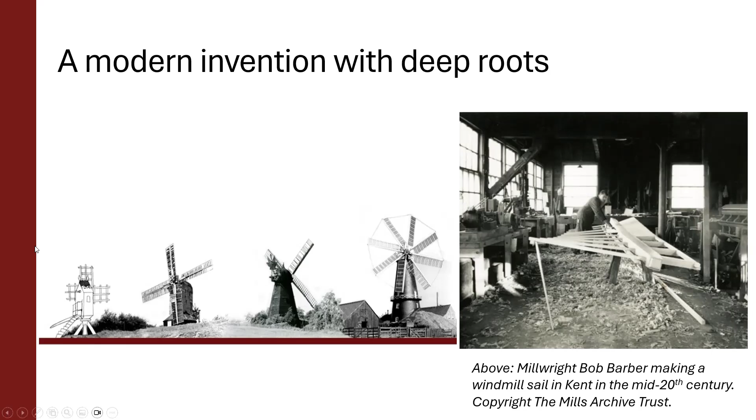They then start to decline. You've got the Industrial Revolution, bigger populations, people moving to the towns, and also cheaper grain, including from abroad in certain places. So what you then see happening is these really big factories being established. The milling technology in terms of food and flour production was also developing, so these big factories could have multiple roller mills rather than millstones, which could produce white flour. The small traditional windmills just couldn't compete. They were rural, they didn't benefit from being surrounded by the fields anymore, so a lot of them fell into disrepair.

But thankfully, there were people back then who could still see the value of them beyond preserving them for cultural reasons. People were looking at them and thinking, well, could this technology be utilized instead to generate electricity? So people were starting to ask those questions. Around the 1870s, we're seeing more developments in electricity generation, and development of lamps, different types of lamp. Electricity started off in the big cities, lighting up public spaces, but over time it was also becoming more affordable to be used in people's houses.

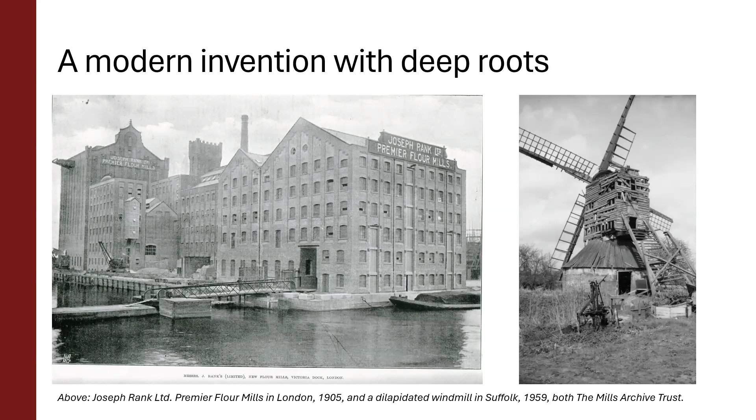I did a bit of digging, this was actually over the internet, this wasn't in our own archive, but this also really makes the point of the value of archives, I would say.

There are some really interesting digitized journals, and I enjoyed going through them trying to find really early conversations about the electricity generation potential of wind. I found one from 1872 where, alongside concerns about the finite nature and rising cost of fossil fuels, particularly coal, the author discusses the use and abuse of coal, noting it's getting very expensive and at some point we'll run out. Although he didn't think wind would be a goer, he felt compared with the steam engine it wouldn't be economical.

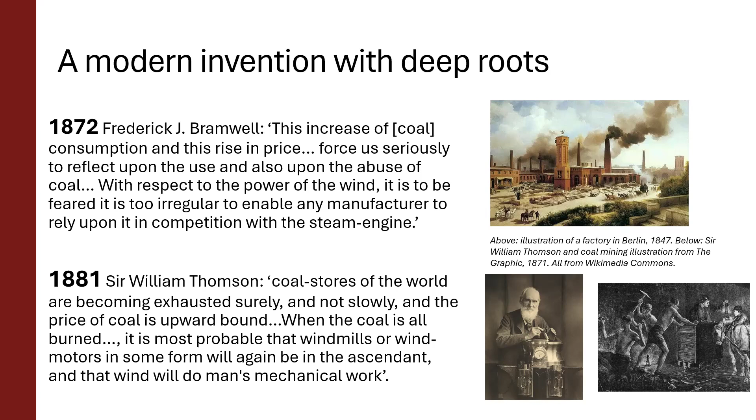Then in 1881, Sir William Thomson again raised concerns about coal supply, but felt that wind could be utilized to generate electricity. What he added was that the technology wasn't yet at a point where it was economical enough to do it, so more work still needed to be done. Interestingly, this is two years before what we now know to be the earliest example of a wind turbine built to generate electricity, which I'll come back to.

Someone else, Mr. Lane Fox Pitt, was asked in another article how much it might cost to light a house with electricity, and he said that with a windmill it would actually be quite cheap to do. Lane Fox Pitt also got a patent for a light bulb, which was acquired by an American pioneer called Charles Brush, who I'll also come back to. I thought that was quite a nice connection.

We will all have heard of Siemens and William Siemens - I should have probably changed the name of my presentation to Pioneers in the Domain of Nature, because that just sounds really powerful. He had quite an extensive article in 1882 talking about the benefits and value of electricity, because it's easy to take these things for granted now. But what we're seeing is a more positive view on the potential use of wind to generate electricity. He also talked quite a bit about the polluting effects of coal burning.

Okay, so thank you for listening to the really early stuff - that's just to give you a bit of context, because I think you'll find that people were building on the inventions and work of those who'd come before them. So now I'm going to look at some of the individuals who were involved and some of their stories as well.

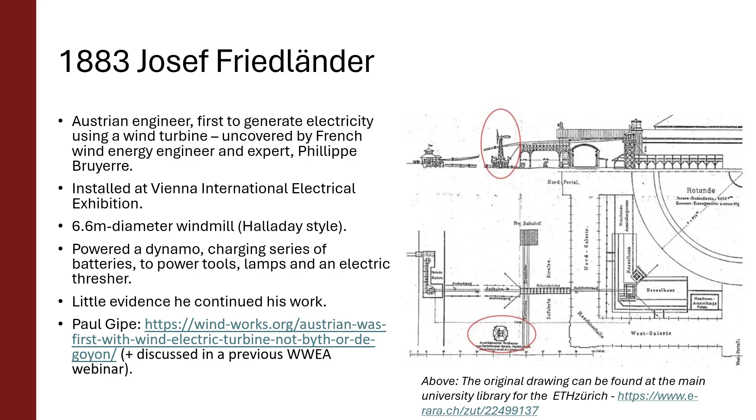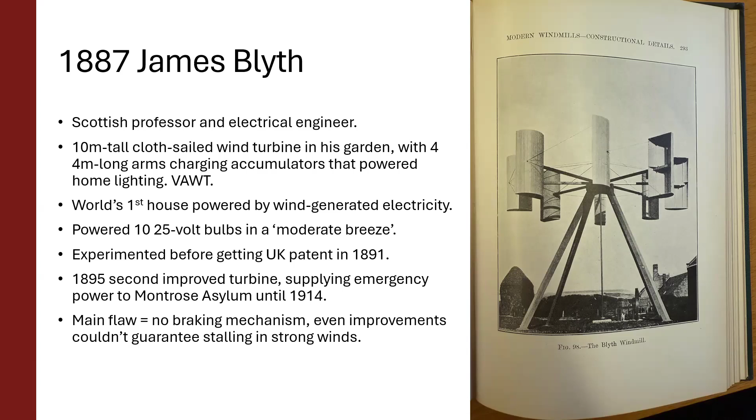This is another one - presumably the first one that he did. You can find these images online, but I also thought I'd include an image of a book we've got in our library called Natural Sources of Power. That's a 1908 book which has a little bit of information about James Blyth and has these images reproduced in it as well.

Now, thank you again, Paul Gipe, in partnership with Erik Möllerström, because I could find very little about this person. Also in 1887, just a little later than James Blyth, Charles de Goyon, a Frenchman, with a group of people designed a wind turbine, and what they were doing was charging batteries for commercial sale. He also designed one at some point to power a lighthouse, funded by the government there.

If you're interested in finding out more, among many other things, Paul and Eric have published this article. It's open access, and it's just part one, so you can also read on more if you would like to. He was using a design similar to those used in North America and Europe, again looking at this issue of trying to reduce the need for people to be involved in reefing them, as we'd say for traditional mills, so reducing the likeliness of them damaging themselves in strong winds - automatically self-regulating.

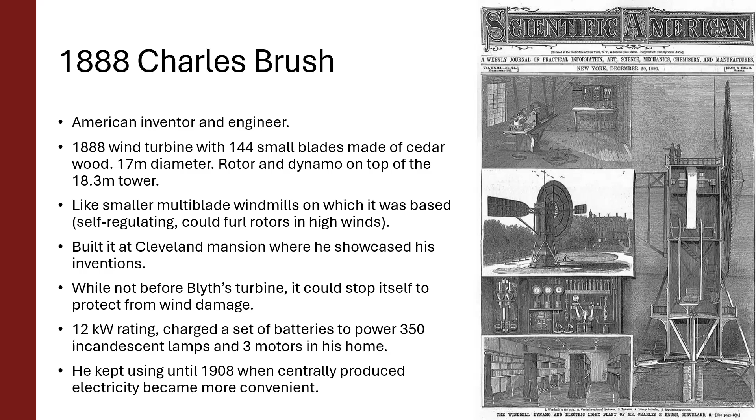He had a lot of successes in his life, a very talented scientist, even before he moved into wind power. But he moved from Copenhagen to somewhere called Askov, and he worked at the high school there, teaching, and then he began experimenting with wind energy.

He managed to get a grant from their government. He was looking at things like how do you regulate the turning speed so you don't get these big spikes. So he developed a new piece of technology called a kratostat.

The other thing he did, and again I got this from Paul Gipe's article, was wind tunnel experiments, which I think sound fascinating. So in 1897 he was doing that to see how could you make it as aerodynamic as possible.

The other thing I liked in Paul's article was he talked about millwrights - the people who had the knowledge to build and repair the traditional windmills. For me this is just showing it's building on, or reinforcing, the traditional knowledge that was already there - in this case, that 4 blades were actually better than 6.

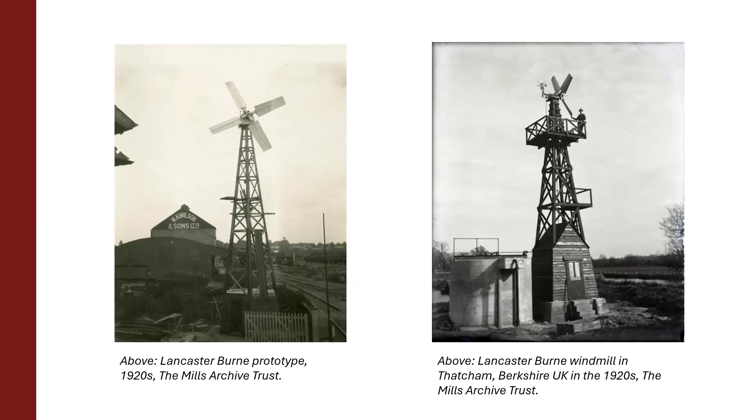And then you see the image on the right - this is actually not too far from where the Mills Archive Trust is based. This is one of these examples of his early wind turbine, which I just think is brilliant. Another example on the left - I think he lived in Blackheath, so this may well have been one also on his grounds as well.

Something really cool happened - I think as a result of a World Wind Energy webinar, someone contacted me afterwards. I don't know if they're in this call actually, a renewable energy professor, and he knew about Lancaster Burne, and he knew that there was at least one example of a Lancaster Burne wind turbine in Australia. So I've had a look, and since then they've actually done a lot more digitization, so you can see now.

This is the University of Melbourne Archives. It's a particular collection, and it was a wealthy family, the Grimwade family, and they had this Lancaster Burne wind turbine in their garden for quite a period. This photo is from 1931, but there's photos going back to 1924. So I'm now dying to find out more - I think they do have some diaries that talk a bit more about how it actually got there, and how that connection was made.

So that was just like a whistle stop tour of the key pioneers. I'm just keeping an eye on the time - I think I'm doing okay actually. So I'm pretty much done now.

Lots more to come from my colleagues.

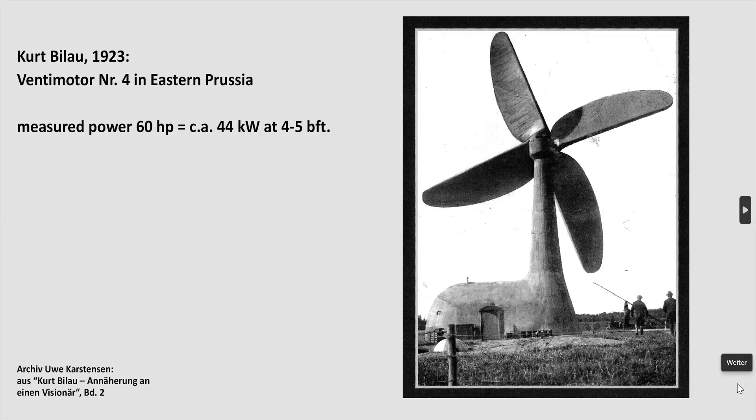He made many Ventimotors. He called this Ventimotor, but this has nothing to do with the Ventimotor company I will later talk about. He called it Ventimotor and built several in Eastern Prussia, I think on the same tower. He has huge concrete towers for this turbine. And yeah, here 60 horsepower is written, but it's 44 kilowatt.

And in 1924, he had built a turbine by a Berlin company, Aerodynamo, and exported it to Oxford. Near Oxford in Great Britain was a test site. It's written in this book that they had 5 English turbines, 1 Danish and 1 German tested there.

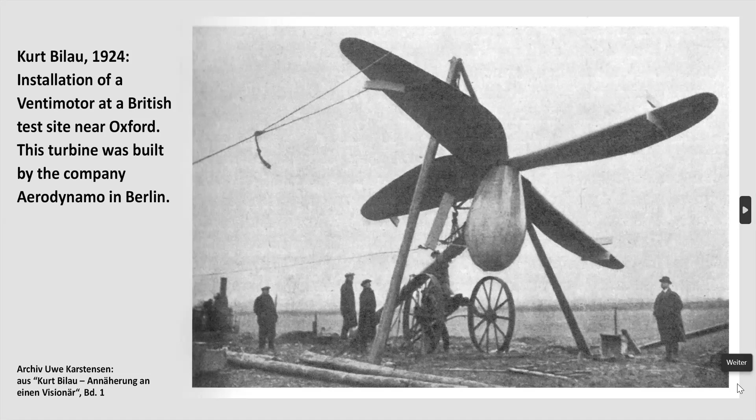But this was later built. Bilau's main advantage, you can still look at it till nowadays, is the Ventikanten wings for old windmills.

He built blades. They look like, if you look at an airplane, they divide when an airplane is landing and will go down, will manage stall, then they divide the wings. This he made with his wings, and there are still 10 of such windmills existing in Germany and in the Netherlands with Bilau Ventikanten.

The 1920s was influenced by aircraft development, and there was a lot of scientific work. The main scientific work important for nowadays is that of Albert Betz at the Aerodynamic Experimental Institute in Göttingen, the Aerodynamische Versuchsanstalt. He wrote in an article, he determined the law of Betz, with a theoretical maximum of the use of wind power. That is 59% of the stream, of the energy of the airstream, that is usable theoretically.

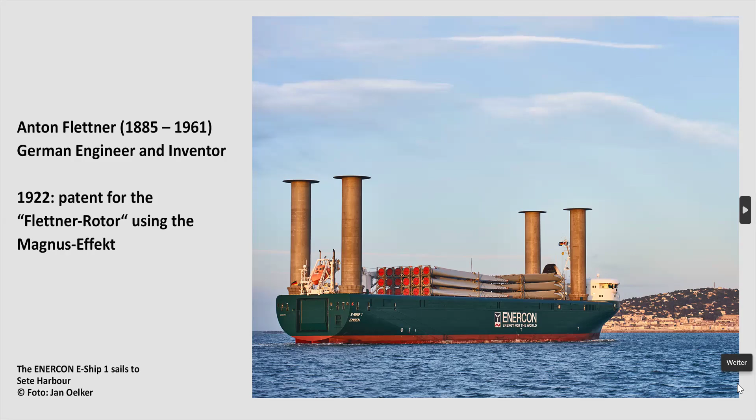Only a few times it was used, and the best hidden secret on the ship was how efficient it works, how much fuel it saves. Sigurd Savonius, a Finnish architect, also influenced by this research, invented the Savonius rotor, using the Magnus effect in another way, with two effects overlaid.

I was in Russia, and they told me that there were a lot of old wind turbines. Thank you to Jos Beurskens - he gave me a couple of years ago some photographs, scans of an album of photos from the Russian wind industry. This was situated mainly in the Tsentralny Aerogidrodinamichesky Institut (TsAGI).

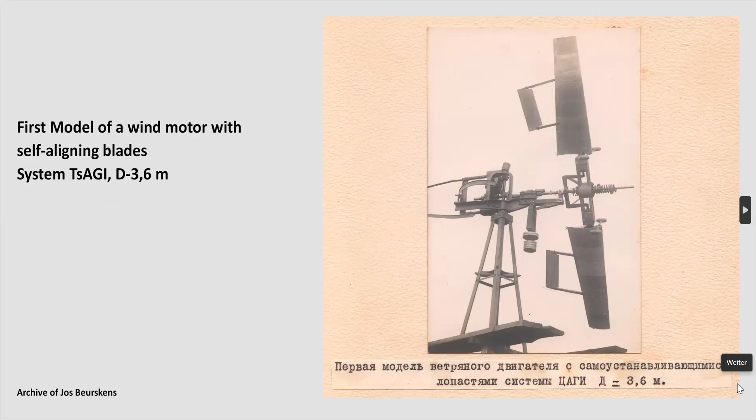This is the Aero and Hydrodynamic Institute in Moscow. It was founded in 1918 and got a department of wind energy in 1920. They developed wind turbines with self-aligning blades. In Moscow they tested it in small systems, and then it spread over the country.

This is a pumping system near Odessa in southern Ukraine, also with a rotor diameter of 8 meters.

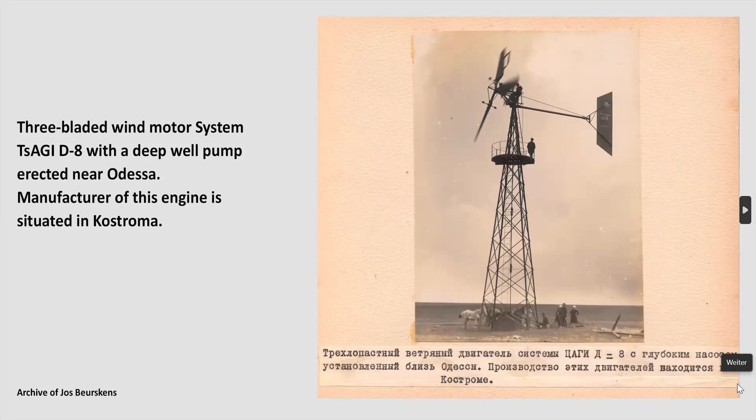Then there was a huge program. The Russians developed a department for the Northern Sea route through the Arctic. It was possible - the first crossing was at the end of the 19th century.

And the carpenter in Uelen told me that such a turbine also used to stand in Uelen, but it was not there anymore.

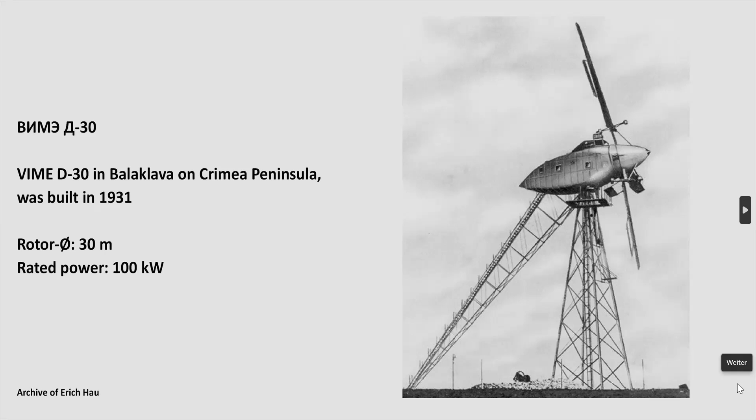The most famous turbine in Russia was a VIME D-30 in Balaklava on Crimea Peninsula. These are from the book of the Vsesoyuzny Institut Mechanizatsii i Elektrifikatsii Selskogo Khozyaystva, the Institute for Mechanization and Electrification of Agriculture. It was built in 1931 on the Crimea Peninsula, but unfortunately there was a war too.

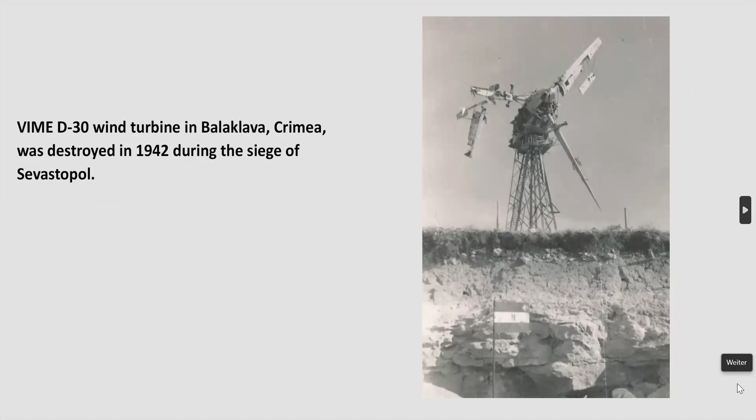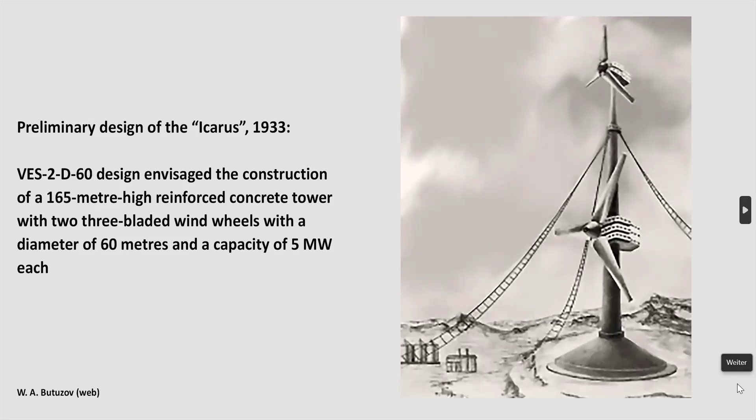The constructor, the architect of this tower, later made the TV tower in Moscow, which is 500 meters high - he had these ideas very early already. This was a time when all countries intended to build great turbines, and the importance for industry became apparent once turbines got bigger than 1 megawatt.

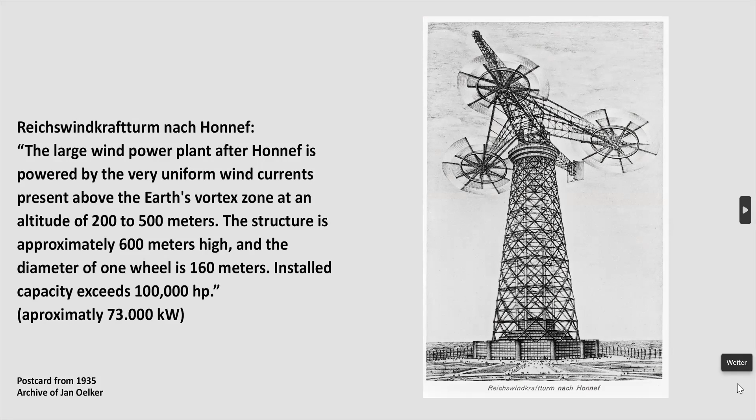It was fantastic, but fantasy. Also a huge plan was the MAN project of MAN and Kleinhans in 1942. But anyway, there was no chance to build this.

It was already the time of war, and neither in Russia nor in Germany was any big turbine built, because all the material went into the war industries. So some suitable windmills were constructed in Denmark with a 70 kilowatt turbine in 1942, the FLS Aeromotor. And of course, the world's first megawatt-size wind turbine at Grandpa's Knob from Smith-Putnam in the USA.

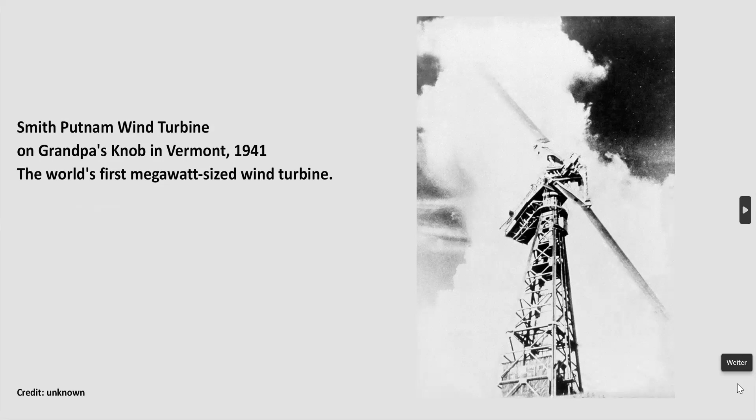The war interrupted everything, and there was also a need for smaller turbines, especially in Germany, with some inventors like Wilhelm Teubert.

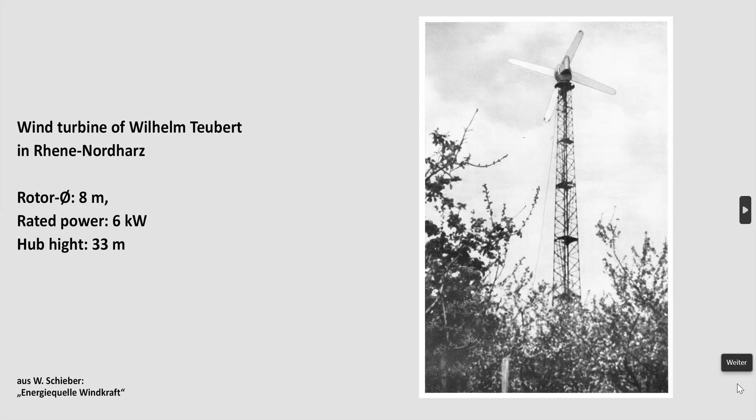He tried to make small turbines together with Gute Hoffnungshütte, and then you have the company Ventimotor, owned by Walter Schieber. Walter Schieber was a member of the SS, an intimus of Hitler, and he suggested making wind turbines for the eastern areas they occupied in the war, to bring power to the eastern occupied areas in Ukraine, Russia, Belarus, and everywhere in Europe where they were, where he had a testing site in Weimar.

At this testing site, Ulrich Hütter could build one of his turbines and make studies, and he wrote his dissertation, a contribution to the creation of design principles for wind power plants, in Weimar. Shortly after publishing his dissertation, he was sent to Stuttgart, where he had to develop systems for the war industry. The wind power program came to a stop, and so did the war in the end.

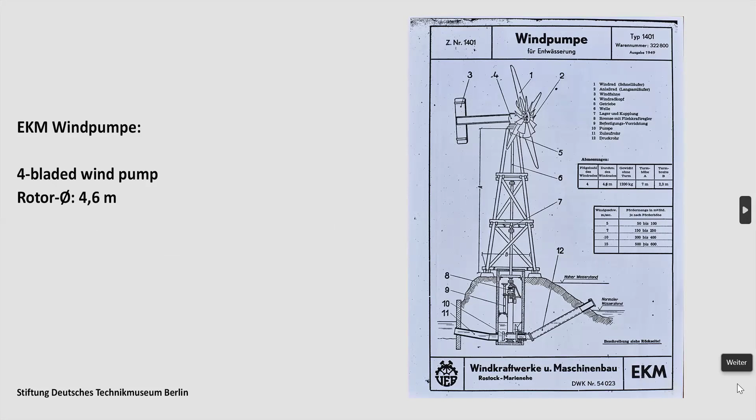In Rostock, there were three airplane factories, and one of these constructed windmills for pumping systems and small chargers. This was a company, EKM Windkraftwerke. EKM means Association of State-Owned Energy and Power Engineering Companies. They built a small four-bladed wind pump with a diameter of 4.6 meters, and a charger with 200 watts for remote areas.

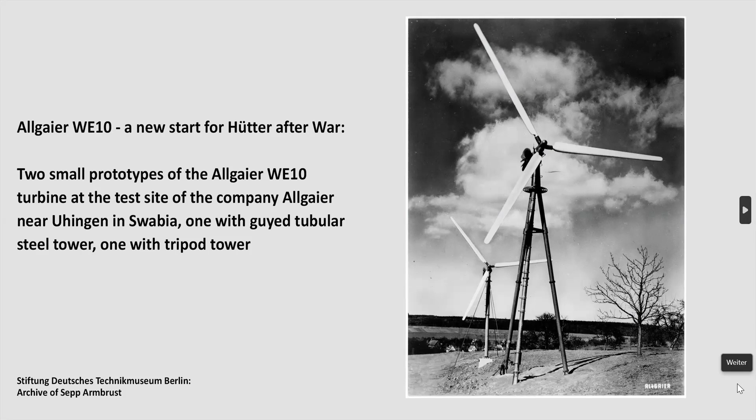In West Germany, the story of Hütter in Stuttgart is well known. He went to the company Allgaier in Uhingen and constructed the WE10. Here is a small test site. From the beginning, they tested their turbines on a tripod or on a guyed tubular steel tower. The Hütter turbine had a diameter of 10 meters, 6 kilowatts, at a hub height of almost 10 meters.

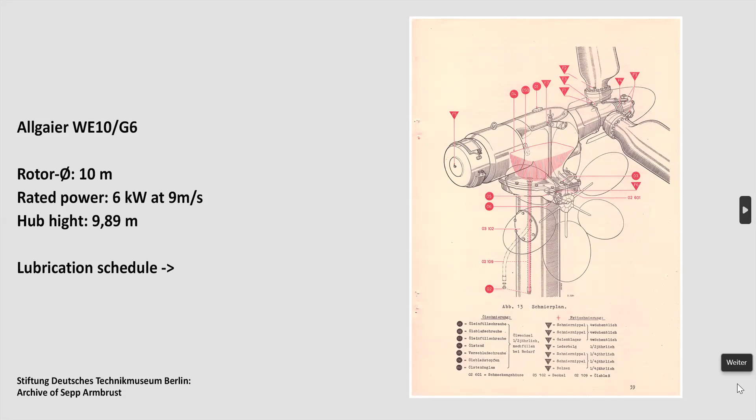They made a market estimation and saw potential especially in remote areas in Germany, on farms not connected to the grid. Here, on Feldberg in Schwarzwald, it fed power for a radio relay station.

But the main aim of Allgaier was export. They produced more than 200 wind turbines and sent them to Southern Africa, here in Namibia, and to Argentina, and Abyssinia, which is today Ethiopia. This was a real export business, but maintenance was always a problem. If you had to send a mechanic to Africa, it could end up more expensive than the turbine itself.

But they also built higher towers, especially since this was needed in Germany. This is at a Landesgartenschau in Hamburg, a garden or park exhibition, where they showed an 80-meter tower with a guyed steel tube. Allgaier also created the first wind farm in Germany.

Eight turbines stood in the Nendorfer Hamrich. This is a wet area; they fed a pumping station on the River Ems. This place where this wind farm once was is now the parking lot of the Meyerwerft in Papenburg.

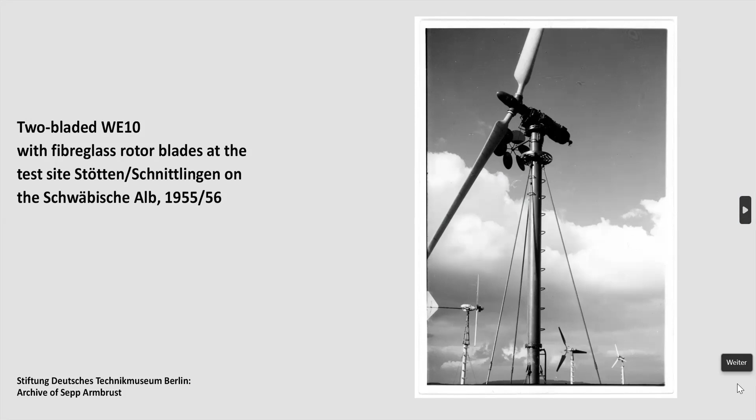This is a test site in Schwäbische Alb, Stötten. The engineer and keeper of the test site for many decades was Sepp Armbrust. He gave all this material I show here from the Allgaier WE10 and the W34, a lot of photographs, to the Stiftung Deutsches Technikmuseum in Berlin, which has a huge photographical archive.

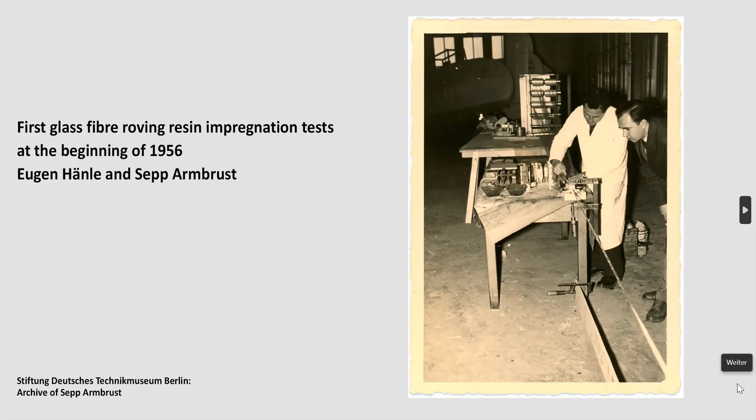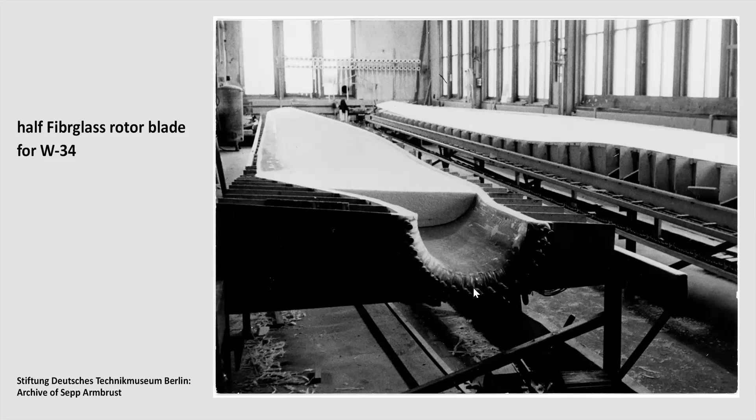Here are experiments at the DVLR, the German Aircraft and Aerospace Institute in Stuttgart. They made the first tests with fiberglass rovings, and you see Eugen Hänle in the white shirt and Sepp Armbrust. These are the first rotor blades. One half of this rotor blade here in the foreground shows how he made the connection to the hub. It's a typical Hütter design.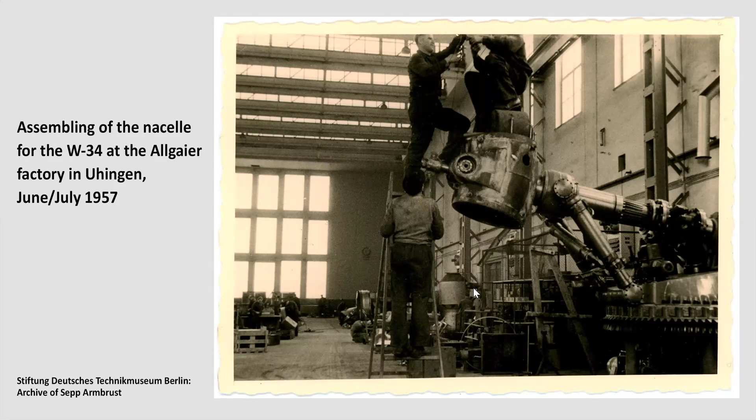In summer 1957, at the Allgaier factory in Uhingen, the next greater turbine was mounted, the W34.

The W34 in Schnittlingen had almost 100 kilowatt power output with 34 meters diameter, and it was the first really grid-connected turbine—they made grid connection here in December of '57.

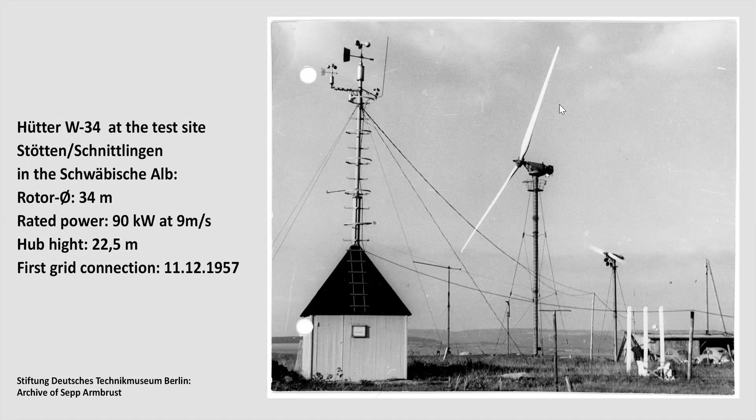In Denmark, parallel, in '56, one year earlier, Johannes Juul built his wind turbine, and it was done in a much easier, not so sophisticated way. It was practical, the Danish design.

They made a journey to Denmark, and these turbines from Juul and Hütter are at least the basis of the common turbines. Juul makes a practical stall design, and as the turbines became larger, more and more the input of Hütter became important.

But about this, Arne will tell in the next speech, and I say thank you for listening to my lecture.

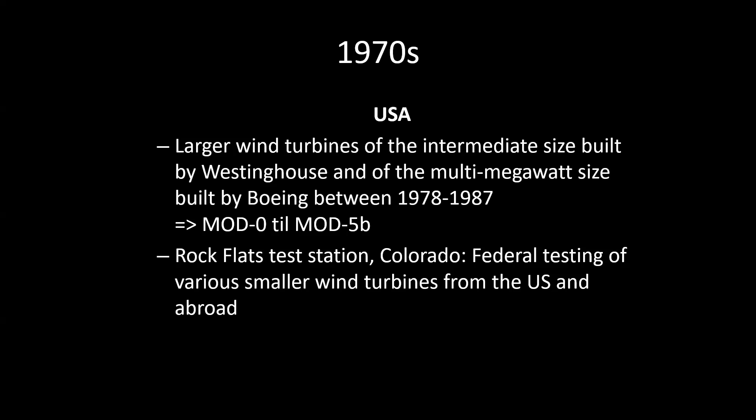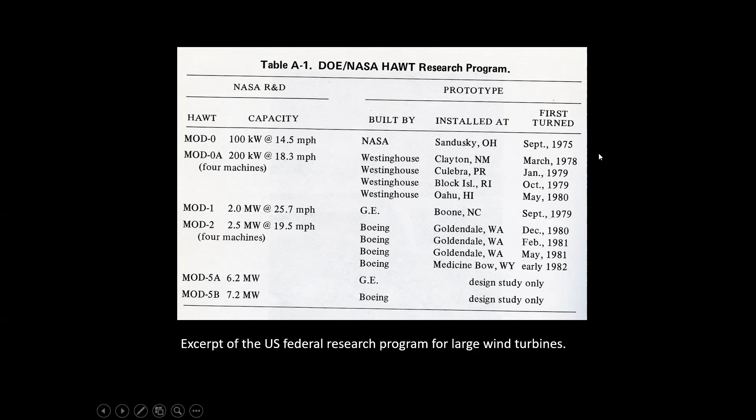So here we have an overview of the so-called MOD-0A turbines. Those were the so-called intermediate size turbines, around 200 kilowatt, built by Westinghouse between 78 and 80. There were 4 machines of that type. Technically and economically they failed in the end, but at least a lot of practical and technical experience was gained. Again, there was a lot of discussion about whether this was the right approach or not. But I have to say, in the end, it was at least right to build it, because wind turbine technology is not something you can just read in a book. You have to do it, you have to practice it, to find out which concept is right and which is wrong.

The company Westinghouse had a commercialized version of these downwind two-bladers in the mid-80s. Westinghouse built a 15-turbine wind farm on the island of Hawaii in '85. They had upscaled this turbine from 200 kilowatt to 600 kilowatt. That wind farm operated, I think, somewhere until the 90s. I don't think they're still operative, but at least Westinghouse tried to commercialize this machine. 600 kilowatt in the mid-80s was a bit too large, but I think it was worth mentioning.

Let's now look at Denmark. Totally different situation — we had a number of small private initiatives across the entire country, which I call grassroots development. In fact, the company Riisager Møllen was the first commercial manufacturer, starting right in 1973. Riisager built 3-bladers between 22 kilowatt and 55 kilowatt. He built and sold these machines before and during the time the Tvind turbine was built. So it's important to stress that Tvind was not the very first wind turbine in Denmark — there were machines before it, commercially.

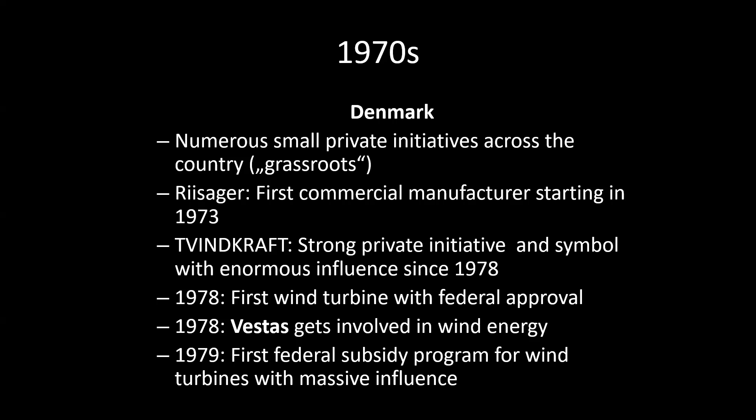In '79, the first federal subsidy program was commenced with 30% state subsidy for each wind turbine someone was interested to purchase, which was quite a lot. That figure dropped to 15% in 1985 because wind turbines became more reliable, more economic, and bigger.

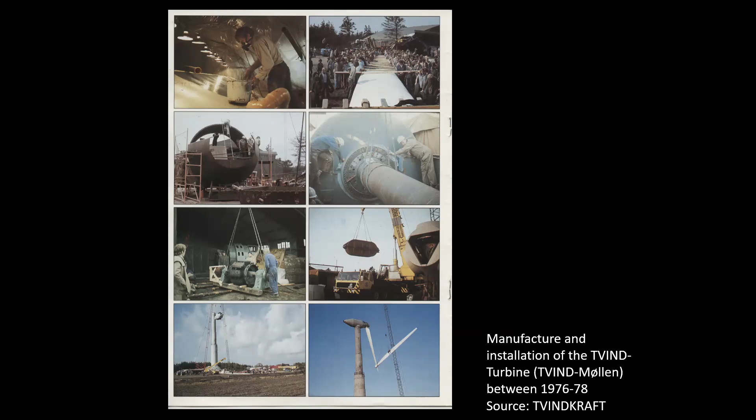What these people did was a very brave, courageous thing. They had no federal support. They did not really have support from the industry, which was on a very small level at the same time. Anyway, they managed to realize this machine.

Before the large Tvind turbine was built, they had built a smaller 22 kilowatt turbine, a fact many people don't know. The big Tvind turbine was not number one, it was actually number two. A lot of technical experience was gained from that first little 22 kilowatt machine, so the bigger machine was easier to set up.

So here's a shot from early 1978, the final steps of the installation of that turbine. I have to say, I was there a couple of times, and even today it's still more than an impressive achievement—it's a more or less magic moment standing under this machine.

The blades of this turbine were changed in 1993, and you'll never guess who made these blades: it was Vestas, in recognition of the accomplishment of what the Tvind people did. And that was quite a lot.

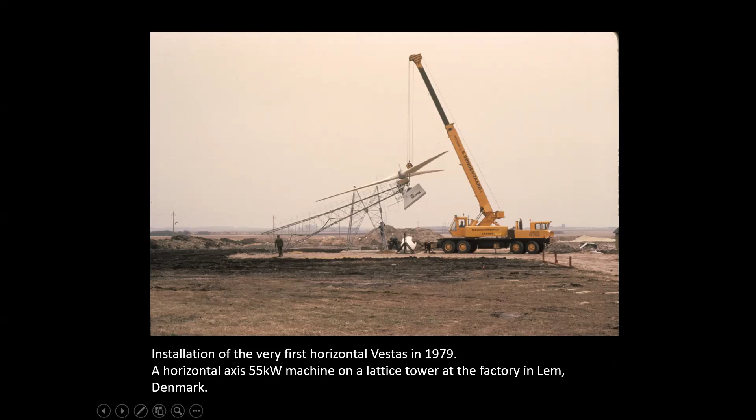Vestas followed this technical concept until '87-'88, when they introduced the pitch machine—this earlier one was a stall regulated machine. In '87, they introduced a 200 kilowatt pitch regulated machine, which was a significant change in their concept. But that was the main concept Vestas had followed for several years, and they were extremely, extremely successful with this way of doing it.

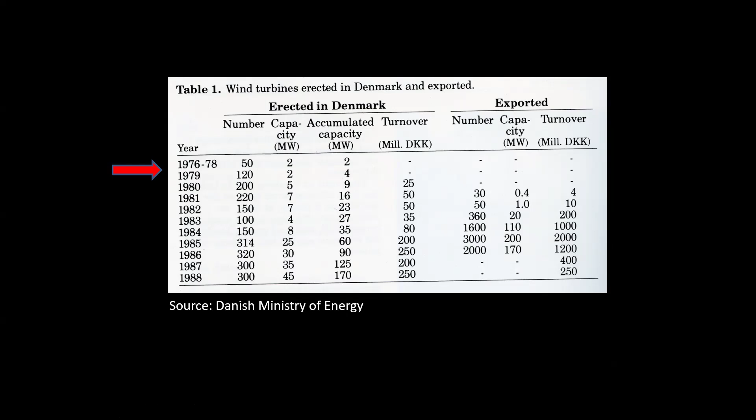So let's look at the 80s. Denmark and the US are still leading, still the top countries that everybody visited and wanted to hear about. The Netherlands became another significant country in Europe to apply wind energy, starting in 83, 84 with another federal support program for wind energy. But the Netherlands did not reach the level of Denmark, and not at all the level of the US. The 1980s was the decade of the first commercial mass application of wind turbines, especially in Denmark and the US.

Parallel to commercial development, there was a rising number of research projects across Europe - Sweden, Germany, also Denmark, the United Kingdom of course, and the Netherlands, and some others - started building research turbines to gather more technical experience in wind turbine technology and also to establish their own wind industry. The 1980s saw a continuous and very fast-paced development internationally, which would continue through the entire 1990s.

Let's look at the standard size of wind turbines in Denmark, which were technically considered the best in the world. In 1980, 22 to 55 kilowatt was the typical size, applied as single turbines, clusters of 3 to 4 machines, and larger wind farms. In 1985, they had reached almost 100 kilowatt, almost twice the size - a huge achievement and a huge risk for the companies to take. In 1989, they achieved the famous class of 250 and 300 kilowatt, again a huge achievement, showing how fast the technical development of wind turbines was already in the 80s, not just today. Wind turbine technology has always been super fast-paced and super competitive.

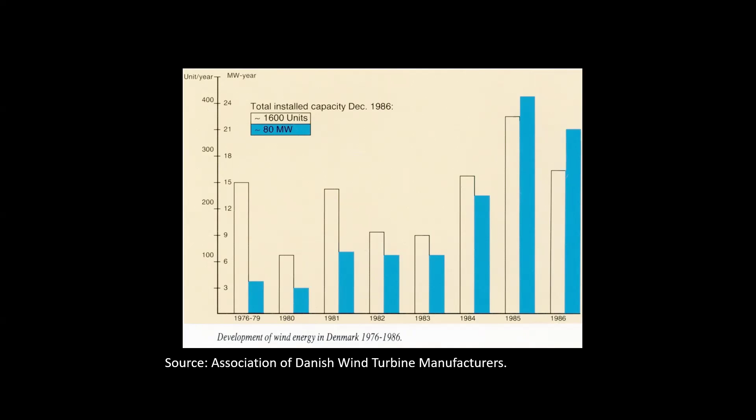Danish export of windmills - just to give you another impression of the importance of the Danes - starting in 82 and peaking in 85 with approximately 3,000 units sent to Altamont Pass, Tehachapi Pass, Palm Springs, and San Gorgonio.

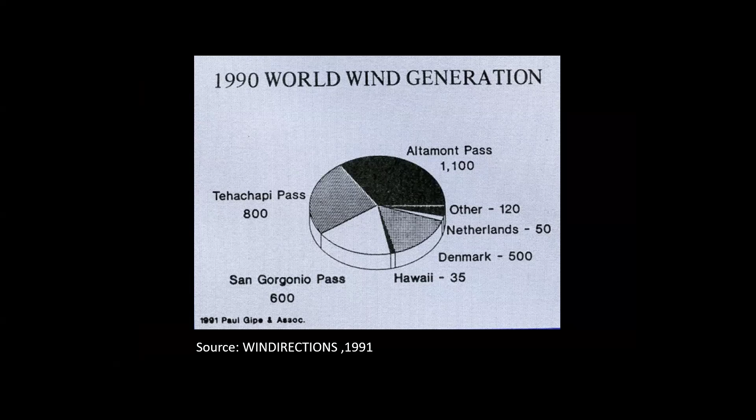Paul created this chart in 1991, telling the entire story about the 1980s. The US was the dominant nation overall. This shows wind generation in 1,000 megawatt hours. California and Hawaii had a super strong position globally. Denmark followed, the Netherlands just a little bit, and everyone else — Germany, India, China, and whatever — remained under the term 'other' at 120, which is like nothing.

Let's have a quick look at the 90s. The 90s were considered the global breakthrough of wind energy worldwide and the entry into the megawatt class — a fast-paced, even more dynamic and highly competitive development in markets. Denmark and the US retained their relevance in general, but Germany became a new leader in installed capacity and was global #1 in 1999. Other Europeans followed: Spain, UK, and the Netherlands.

In 1993, we had the first commercial 1 megawatt turbine available, by Dutch company NedWind — they were the first to introduce serial megawatt turbines. In 1999, Nordex introduced a prototype of 2.5 megawatts installed at the famous test site at Grevenbroich. I was there in January 2000 — a very impressive machine. Europe as a whole became the new mecca of wind energy, parallel to the US, and we had a slight shift in technological progress and installed capacity from the US to Europe.

In the US, California remained on top, plus new projects. Other states like Minnesota and Iowa followed. On the US side, we had two American companies: Zond, the former wind developer, turned into a developer and manufacturer of wind turbines.

Kenetech, the former US Windpower, realized huge projects as well. They had machines between 100 and 400 kilowatt. Foreign companies in the US in the 90s were especially Mitsubishi, Vestas, and NEG Micon, the merger of Nordtank and Micon. Denmark in the 90s was still technologically leading.

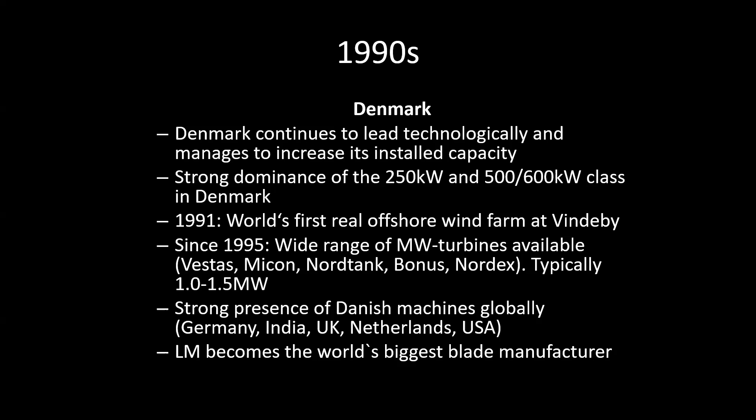In the mid-90s, strong dominance of the 500 kilowatt, 600 kilowatt, and 250 kilowatt class. In 1991, the world's first real offshore wind farm opened at Vindeby. Since 1995, the Danes managed to develop and produce megawatt turbines. Vestas, Micon, Nordtank, Bonus, and Nordex were typical names, with typical sizes from 1 to 1.5 megawatt. The Danes had a very strong international position, especially in Germany, India, the UK, and later the Netherlands and the US. The famous blade producer LM became number one on the globe.

A typical superstar of the 1990s was the Vestas 1.5 megawatt, installed at Tjæreborg Enge in 1996. This was a big achievement for Vestas, and proof that the Danes were still leading technologically.

Germany became the new superstar in the 90s. In 1989 we saw the first wind fair at Husum, called Husumer Windenergietage at the time. In 1991 came the famous Stromeinspeisungsgesetz, the Electricity Feed-in Act, which was the legal basis for the massive boom most of us know during the whole 1990s in Germany.

1992 was a revolutionary year: Enercon installed its first gearless turbine, a 450 kilowatt machine. Germany became the new leader in Europe regarding installed capacity in the late 90s.

Nevertheless, the Danes had a super strong position in the German market—at least 50% of all German projects were realized with Danish wind turbines. We had two big rivaling companies, the super famous Enercon and the almost forgotten Tacke. Back in the 90s, these were the two superstars Germany had to offer.